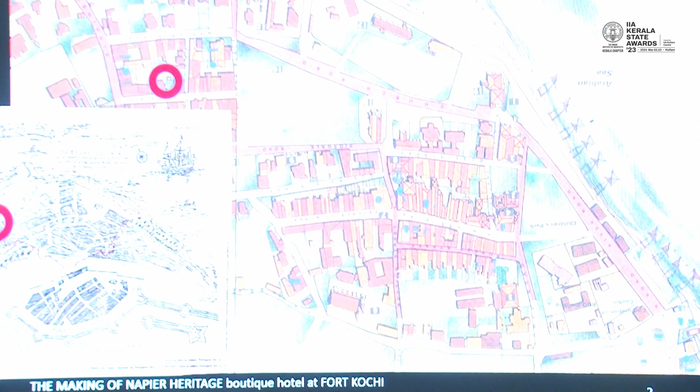Let me get straight into the topic since my time is limited. Fort Kochi is one of the most sought-after destinations for every tourist, whether inland or abroad. It has maintained its physical boundary right from the Dutch period till date. The lower map is the Dutch one, and the larger map on top is the present one. The marked site is where our project lies, and both maps are more or less the same, retaining the same configuration. The most beautiful part is that it's the only place in the world where three colonial powers ruled continuously without a break. That is the beauty of this place.

All the contributions in these layers are still seen there, so in this larger context we have to look at the whole scene. Fort Kochi is also trying to get a UNESCO heritage tag, and we are trying our level best. This shows the three colonial powers. The most beautiful part of Cochin is its urban scape — every street has its own character, with different typologies of forms: street forms, bungalow forms, and courtyard forms. All these give beauty to the whole thing.

Looking at this, in 1999 the state government declared the entire Fort Kochi and Mattancherry as the first heritage zone of Kerala state. Following this, restrictions were put in place through an Urban Arts Commission or Art and Heritage Commission, which set guidelines for the type of buildings that could come up, in order to maintain the character. Because the whole tourist flow is basically to look into the architectural character and cultural heritage — that's the only reason people are coming. So it's necessary for us to maintain it.

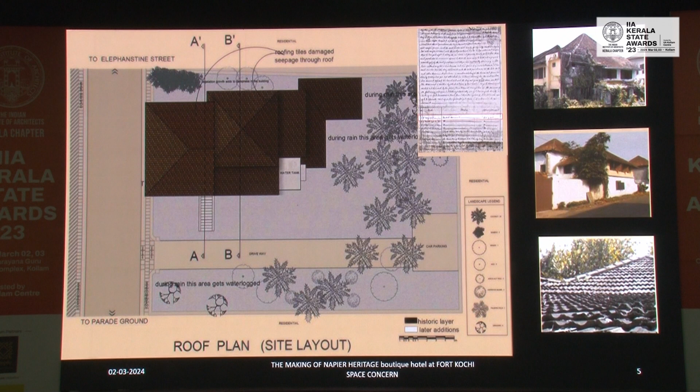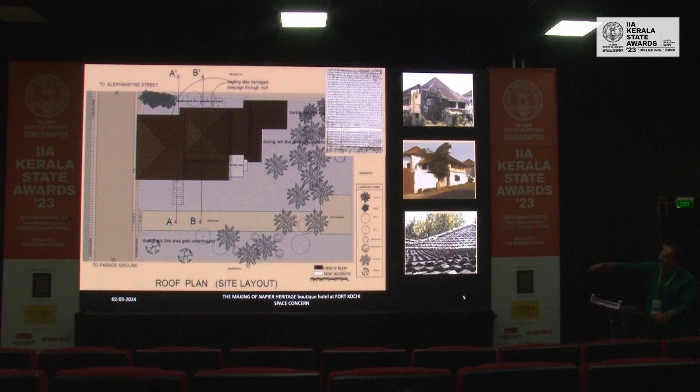In this context, we have this building coming up on Lilly Street, which is part of a larger complex. When we started looking at it, this was one portion, but towards the north there was another complex, and towards the west also there was another complex, forming a larger part of the whole thing. The entire property was originally a Dutch property.

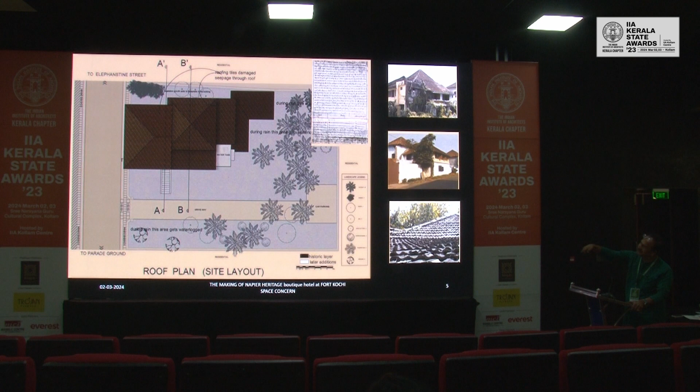We looked into the research, and the red marking, though very difficult to read, is clearly designated as 1765, the Dutch period. It's a Dutch document, clearly mentioning this. So the entire thing was covered in a Dutch document, but over time it got cut down into three different parts.

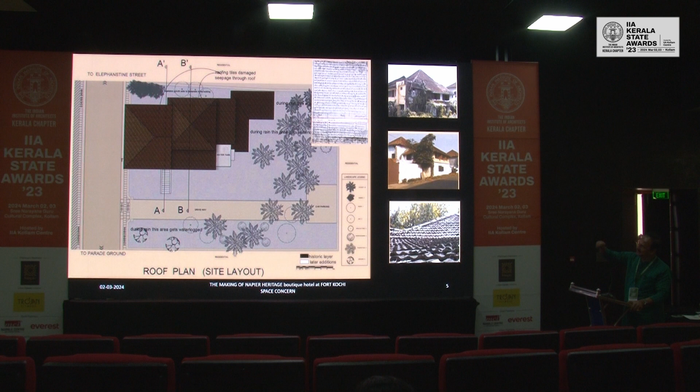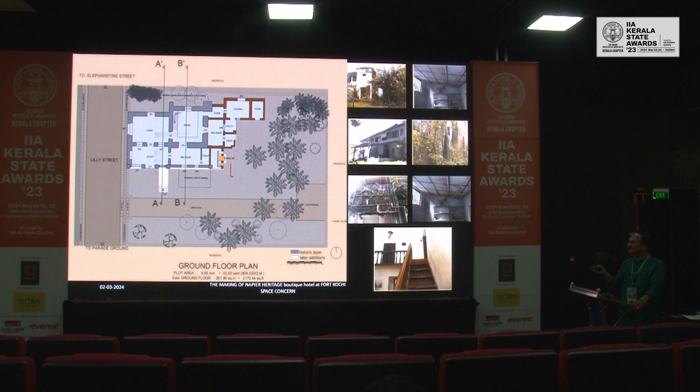The owner was giving it out for videography and other kinds of shoots, so it kept going dilapidated day by day without maintenance. Even when it rained, the entire area would get waterlogged. This was the condition when we took over the building.

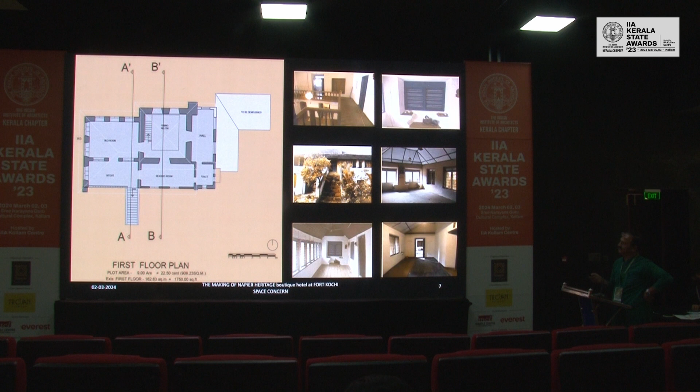This was the first floor of the building. This staircase was a later addition, done to give the upper floor out as rent, not part of the original design, since there was already a staircase inside used by the inmates of the house. This was the condition of the roof, as it kept changing — a lot of interventions were added in terms of changing the floor and the roof. This also led to the dilapidated condition, because there was seepage of water and no proper drainage. All this contributed to the water tank issue and the overall decay of the building.

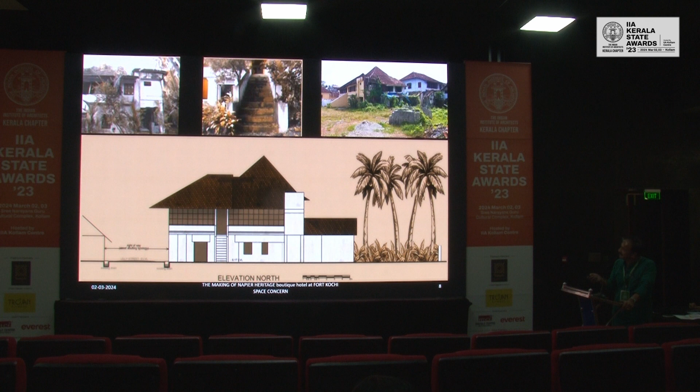Everything was added later, which also added to the decay of the building. This is the facade of the building, which has also changed, because the Dutch building used to have nice windows overlooking the street.

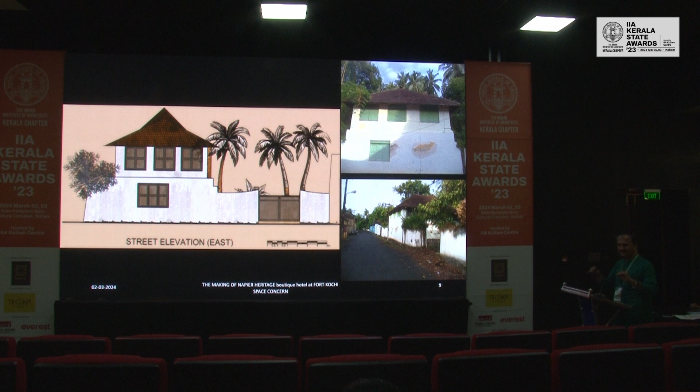The Dutch used to have windows overlooking the street with seats on both sides. The hobby of Dutch ladies was generally to sit by the window — they were so lazy they didn't even like to peep through the window outside. Instead, they had a mirror on either side and looked into the mirror to see what was happening on the street. That kind of window can be seen at the top.

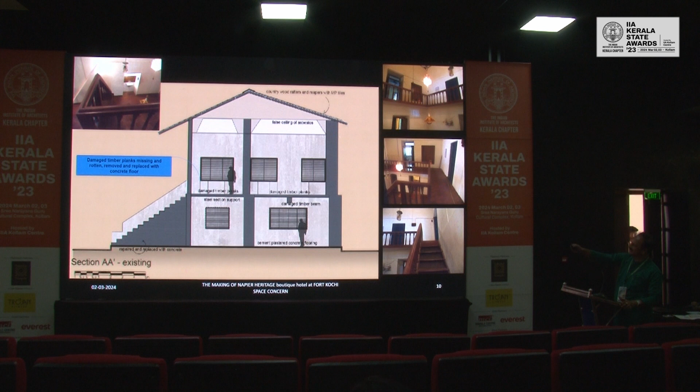These are the Dutch windows I was talking about, with seats on either side which we could decipher there. So we thought of putting those elements back and retaining them. And these were the staircases which already existed there.

This was the present condition when we looked into the staircase and the roof form. One of the leads I took was from Pierce Leslie bungalow, on the corner of the Bastion bungalow side, which has been changed over a period. This was the original form, and much earlier they changed it, and later in the British period they changed it into this form. So this was the kind of building which informed it.

So this was one of the leads I took to decide the concept. When I started looking at the concept, the orange part on top we retained - that's the old part - and the pink part was newly added. The whole concept was to retain the open space as such, and in future, when we get the Napier house, we'd like to connect that and also the property on the north. So this was the whole concept.

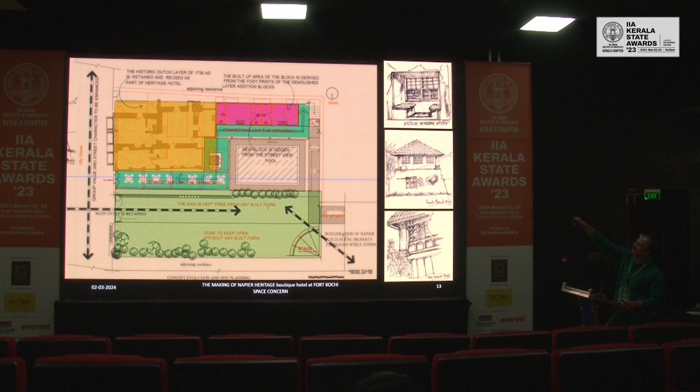So we retained the whole green space as such and added only the pink part, which matched the footprint of what we originally demolished from the later additions. When we tried to connect the whole link through that green space, the connecting link was a veranda which formed the linkage. These were the Dutch elements which we identified and tried to incorporate into the whole thing.

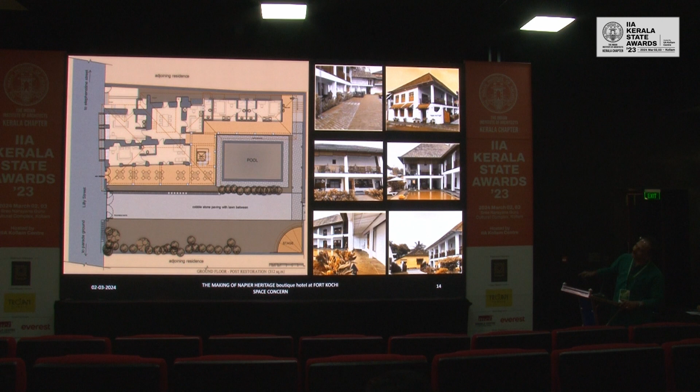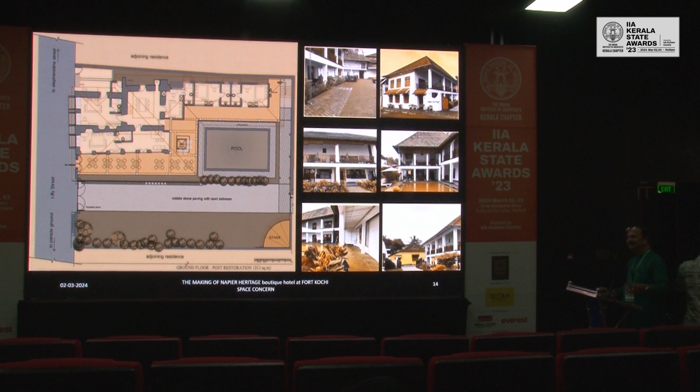Once we started doing it, we decided to convert it into a small boutique hotel without changing its typology. We just added the additional form in the rooms. So we were able to get around 5 rooms at the ground floor and 6 rooms on top.

Initially the kitchen was planned over here, so they were also lacking rooms. But later in the process, we were able to fetch the Napier house property, which helped because this was already planned. We had this veranda linking straight into the other side, so we moved the kitchen into the Napier house and took the whole rooms over here. So this was the transformation you see.

One of the major changes I did was to change the whole roof into the typical Dutch roof form. The span was almost 15 meters, so we weren't able to do it with wood because it was becoming very costly for the client. I was trying to convince the client to make it, because he wanted to demolish the whole thing and put up a 2-storied building. But somehow we convinced him and he agreed to retain this and add to it, and he was also very prosperous, which helped us doing this.

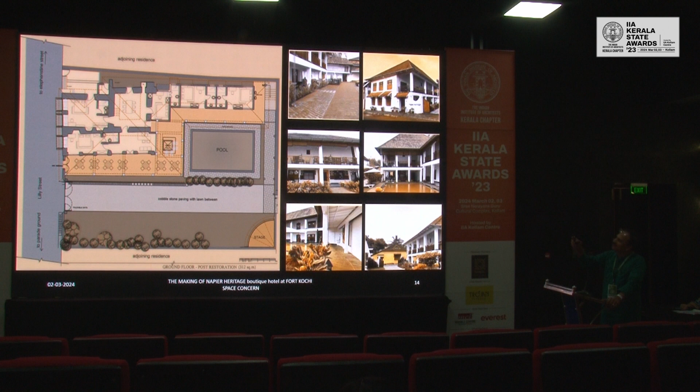So the roof form was done with MS steel sections, so that any later addition, if wanted, could be easily removed. It's like a prefabricated roof form, and we tried to retain that, and also added the gutter so that the entire rainwater is collected and recharged.

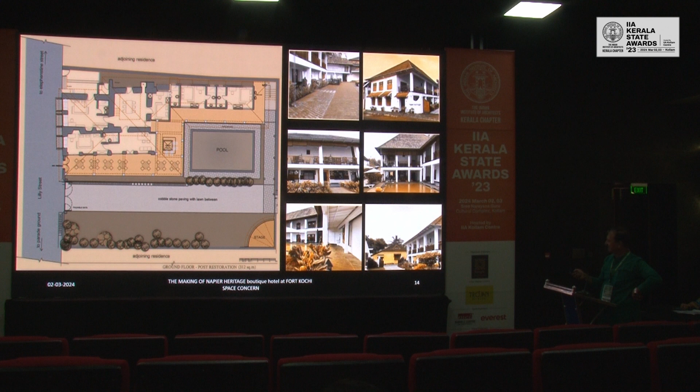This was the first floor we tried to add, and these are the blue tiles we used because they were typical Jewish blue pottery tiles - at some point in time the Jews were also residing here. The prayer house was on this side and the Jewish quarter on this side.

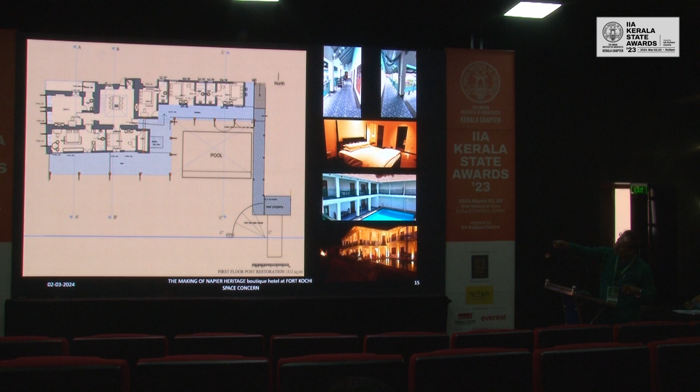So in future we want to convert the entire thing back to the original form. That's why we have kept the whole thing. We hope on the north side property also, in future we may get it. We have taken on the west side also.

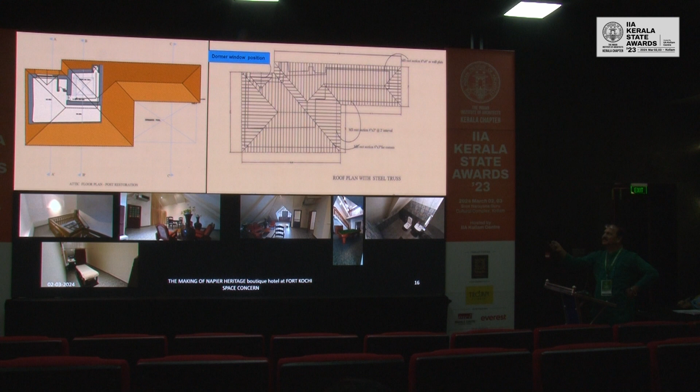When we added the pool, this was the kind of roof form we took. When we did the roof form, we had the attic, so we used that attic space also as a spa. Initially it was designed as a dormitory, but now it's been used as a spa with a toilet.

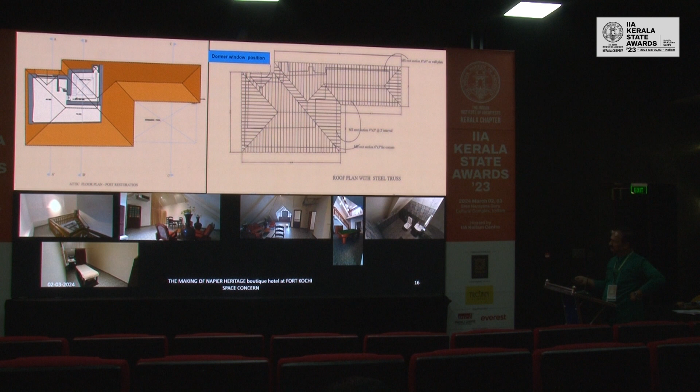All the services were also taken down through the south side. If you look, this is the restored section we got, with the retained elements. We also had universal accessibility through a small lift attached on the southern side externally - it's a hydraulic lift we provided for just 2 passengers to go up.

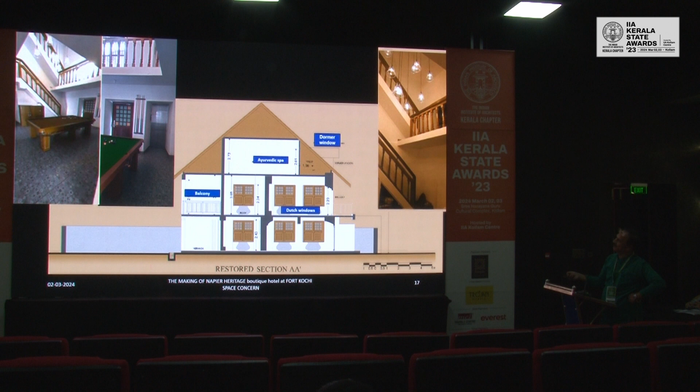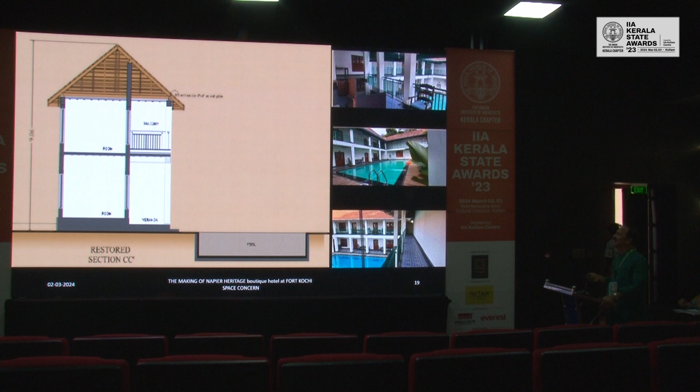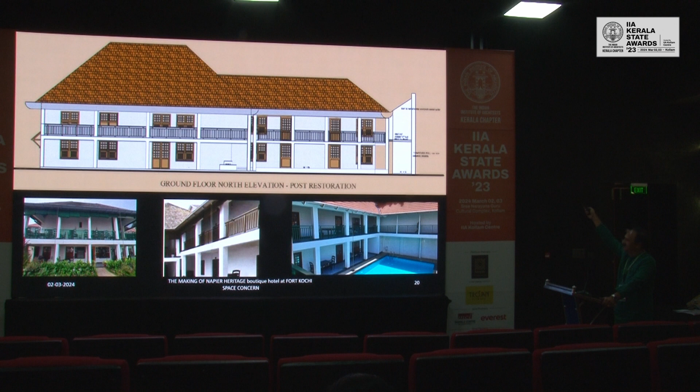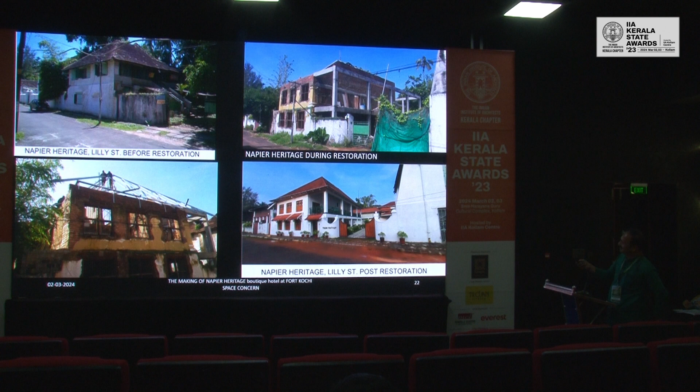This is the kind of roof form we were able to achieve, with the swimming pool on the southeast side, and this is what we achieved in the end. We restored the facade and removed the staircase because that was a later addition. We brought in a circulation space in the front overlooking the pool and the open space, and then we added these 3 Dutch windows again on the top floor with the typical bracket.

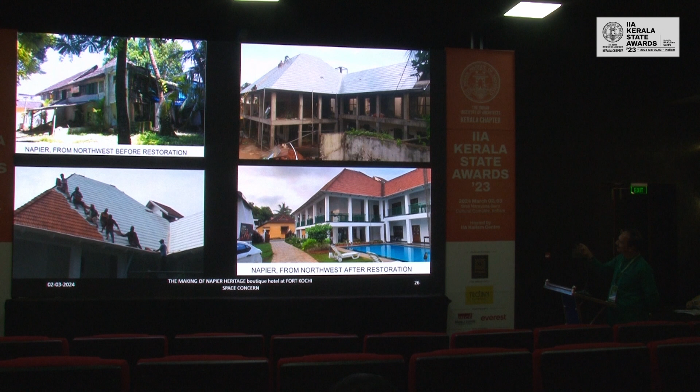These are the transformations you can see, how it happened over the period - this is before and after, and this was the roof form. We used Mangalore pattern tiles, and this wall we retained as such because we wanted to show the different layers that have come about.

And this is what happened - this is the pool and the small auditorium we designed on the corner. These are the interiors which add ambience to the whole space. We didn't change the typology - not even a single wall was removed.

And this is the streetscape, what you see from the street, because this gives character to the whole street. So we added it as if it's a part of the whole street.